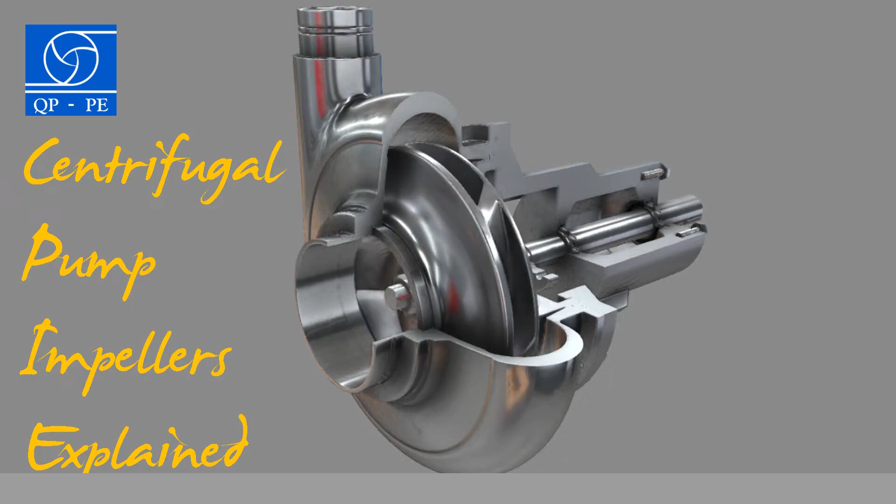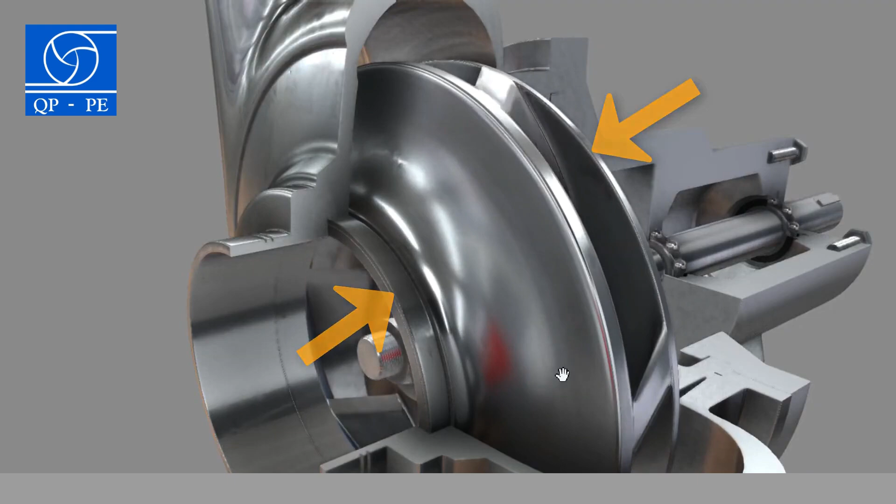So here is our centrifugal pump. I'll do a little spin. You can see the exterior appearance here, and if we spin back the other way, we can see a cross section of the pump as well. The impeller is housed within the volute casing, and the impeller is the rotating item that we're looking at now. Before we have a look at how the impeller works, let's go and have a look at the parts that make up an impeller.

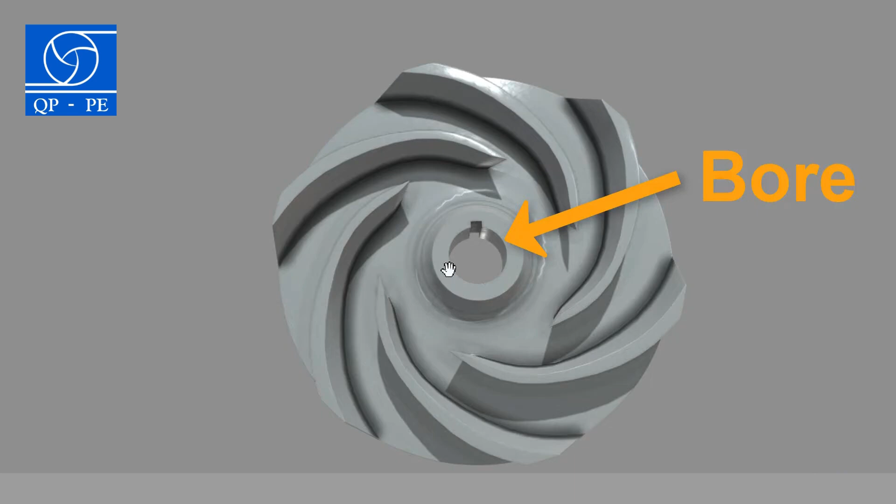As you can see, we've got quite a spirally shape. This is the impeller viewed from the top. We've got a bore in the middle. That allows us to connect the shaft to the impeller, and the angular rotary motion from the shaft can then be transferred to the impeller. The items indicated now are called vanes, and the gaps between the vanes are known as channels.

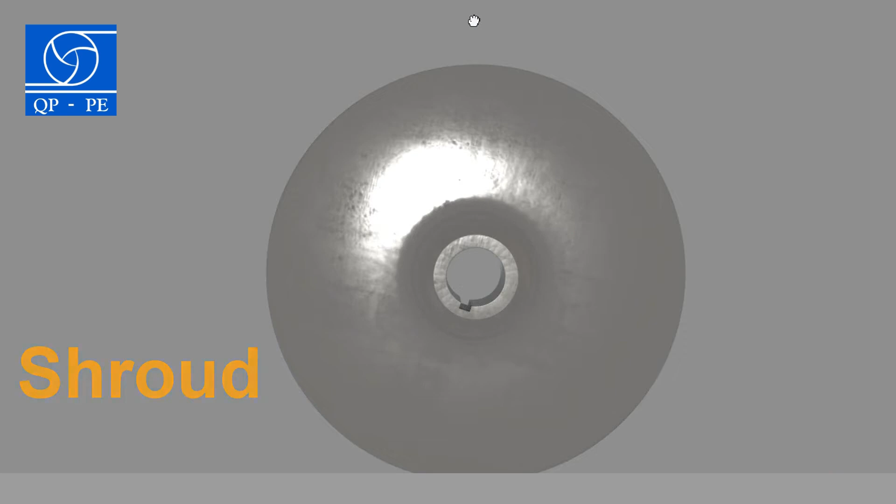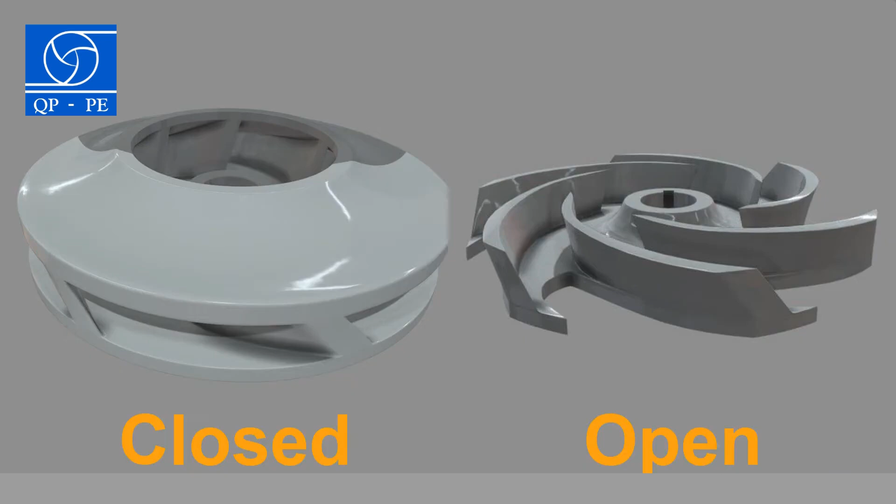On the back side of the impeller is a base plate, and this plate is what they refer to as a shroud. It's possible for impellers to have 2, 1 or no shrouds. Let's just rotate back around the other side. The type of impeller we're looking at now is called a semi-open impeller because it only has 1 shroud. There are 2 other designs of impeller, and these are referred to as closed or open. We're going to look at these different designs later in the video.

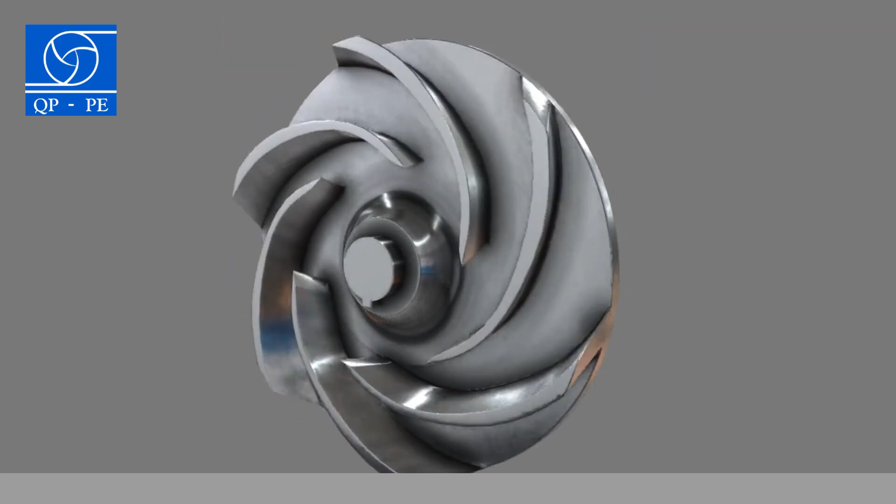Now that we know the names of all the impeller's main components, let's have a look at how exactly the impeller works. Well, the impeller's job is to change kinetic energy into pressure energy. So we're exchanging velocity for pressure. We use a prime mover, such as an electric motor, in order to rotate the impeller. The impeller rotates within a fluid, and as it does so, it creates a negative pressure around the impeller eye, which is located at the centre of the impeller. This negative pressure draws the fluid into the impeller. Because the impeller is rotating, the fluid is thrown outwards radially due to the centrifugal force that's imparted on it from the impeller.

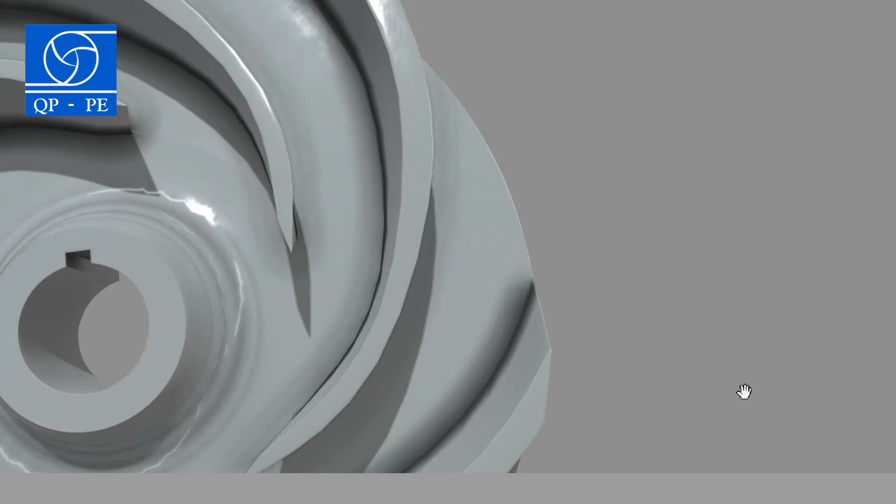Notice that each of the vanes has a gradually increasing gap between it and its neighbour. For example, we can see here that the gap is quite small, and when we get to the outer periphery, the gap has become quite large. This change in dimension is the reason the impeller can change velocity to pressure. Bernoulli's principle states that if we have a constant flow and a change in area, then the velocity will be correspondingly changed as well. So if we have a steady flow and we have an increase in area, we'll get a corresponding reduction in velocity. If we have a steady flow and a decrease in area, we'll get a corresponding increase in velocity.

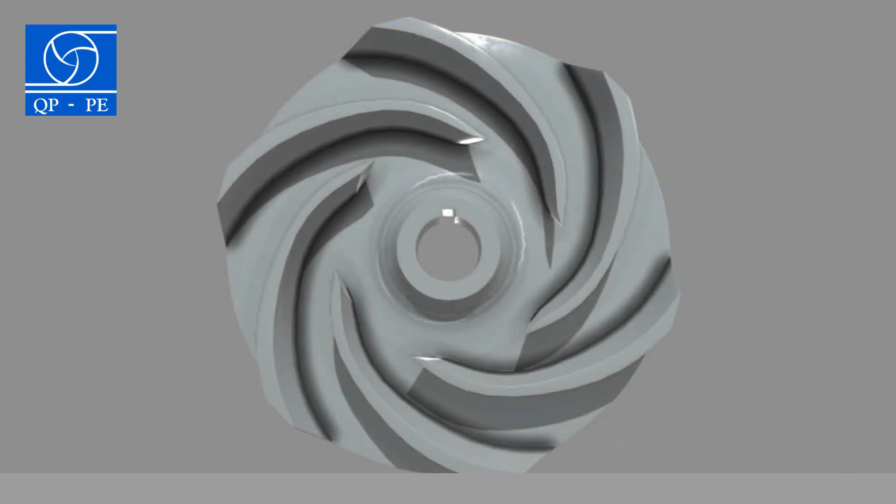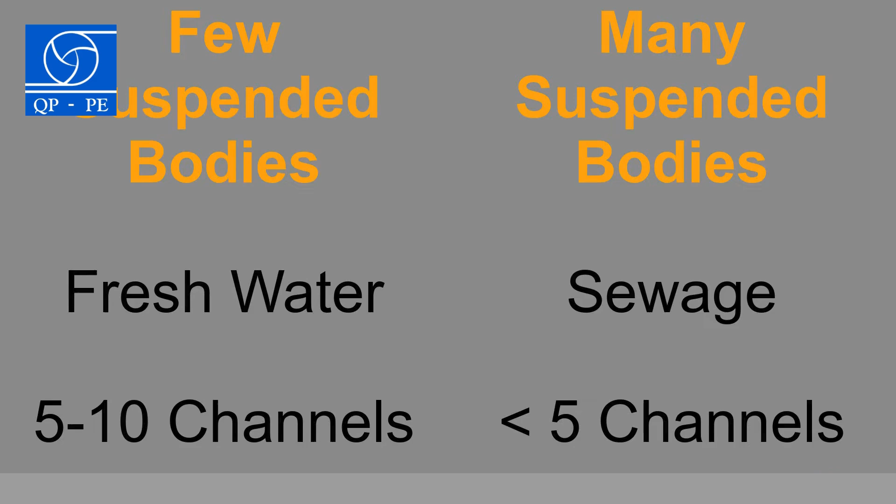Notice also that the impeller has a certain number of channels, and the number of channels varies depending upon the fluid being pumped. For fluids with few or no suspended bodies, such as fresh water, the impeller will have between 5 to 10 separate channels. As the number of suspended bodies within the fluid increases, the number of channels will decrease. Varying the number of channels depending upon the flowing medium will ensure the best possible pump performance. Once the fluid leaves the impeller, it's going to be discharged to either a volute casing or a diffuser, both of which help convert more of that kinetic energy into pressure. Let's now have a look at the different impeller designs.

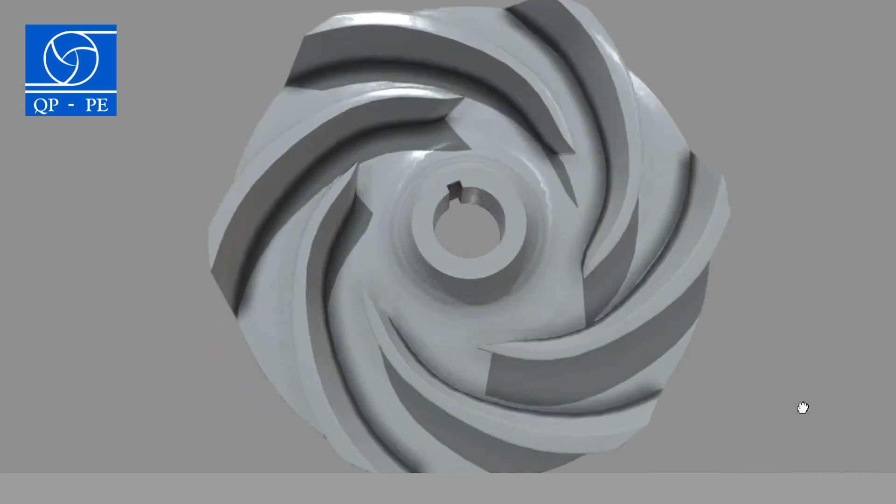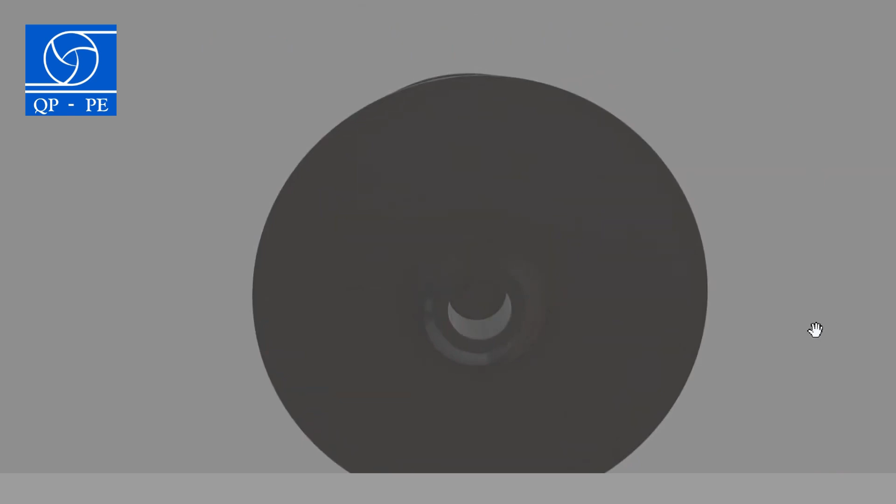As already mentioned, it's possible to have an open impeller. That's one that has no shrouds, such as the one we're looking at now. A semi-open impeller, which has one shroud, and a fully closed impeller, which has a shroud both on the top and the bottom. Open impellers are ideally suited for handling fluids with a large amount of suspended solids. However, they are also structurally weak and inefficient.

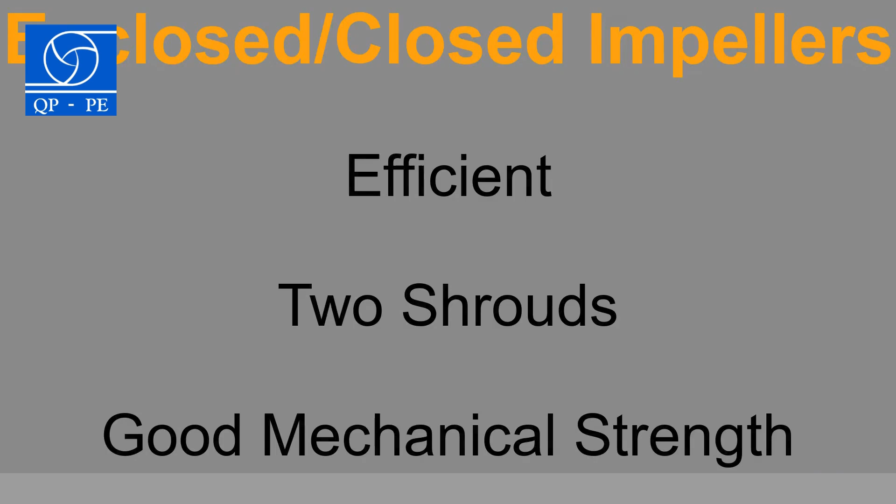Semi-open or semi-closed impellers have a greater mechanical strength than open impellers due to the shroud where the vanes are mounted. This type of impeller is ideally suited to handle fluids with small amounts of suspended solids. Closed-type impellers are the most efficient type of impeller, compared to the semi-open and fully open designs. Closed-type impellers employ a front and a back shroud, and this use of shrouds gives the closed impeller a much greater mechanical strength compared to the open and semi-open impeller designs. Although closed impellers can pump slurries or fluids with a large amount of suspended solids, the wear rate on the impeller will be excessively high. The closed-type impeller is typically used for fluids with a very low number of suspended solids.

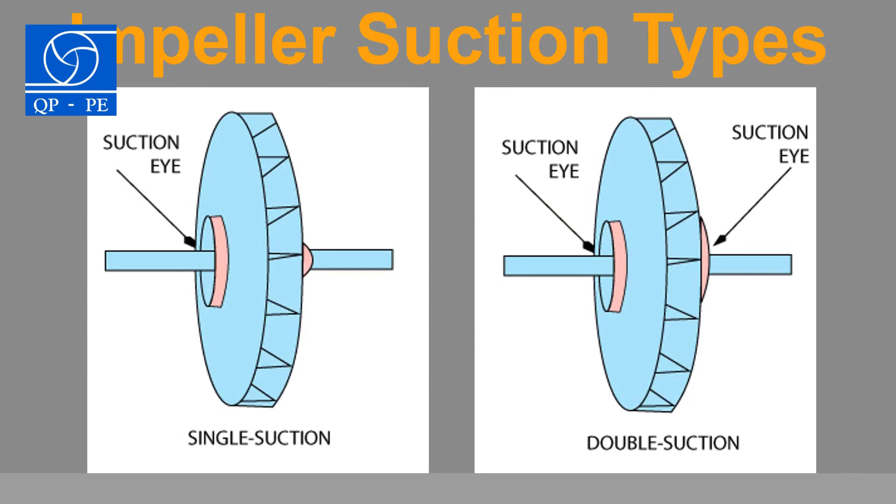Impellers are also classified by suction type. This can be either single or double. A single inlet impeller allows the fluid to enter on only one side of the impeller. The single inlet impeller is the most common type of impeller used for centrifugal pumps. The double inlet impeller allows fluid to enter from both sides of the impeller.

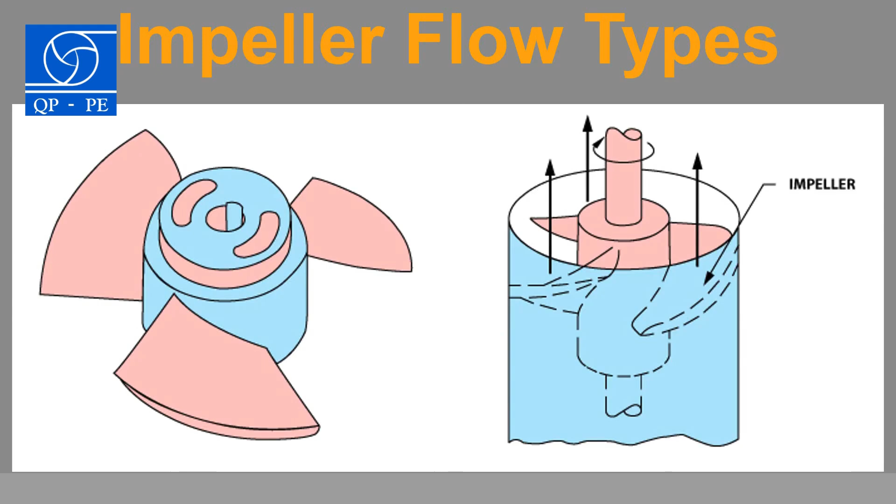It's also possible to classify impellers by the flow type. Radial impellers are those impellers that we've been looking at throughout this video. These are impellers that use centrifugal force to throw the fluid out radially away from the center eye of the impeller. Mixed flow impellers use a combination of radial and axial flow. Axial flow impellers rely almost exclusively upon axial flow, although some of the fluid is thrown out radially due to the centrifugal motion of the impeller, and that is why axial flow impellers are still classified as centrifugal impellers.